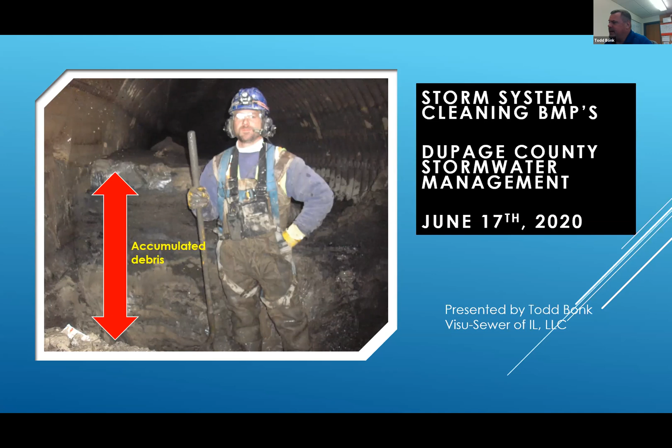Typical storm sewer system is designed with catch basins. Those catch basins need to be cleaned out on a regular basis. Once that sump is full, the debris will start going down the pipes. I guess the thing I want to caution everyone on is this is your storm main running down the middle of a street.

How does that water get into your system? Typically, it gets in through curb inlets with leaders coming into the storm system, to the storm main. A lot of times those curb inlets don't have sumps, they don't have catch basins. They're using the sump going down the middle of the road to catch all the debris. You can get debris into that 8-inch or 12-inch pipe, and next thing you know you've got a blockage and you're getting a backup on your street.

Luckily it's stormwater and not sanitary, but at the same time it's going to cause more issues unless we get that debris out of there. So one of the things we're going to talk a lot about is how pipes fail, what happens when they do fail, and some storm cleaning standard operating procedures that are really something you want to at least investigate, and we would strongly encourage you to adopt.

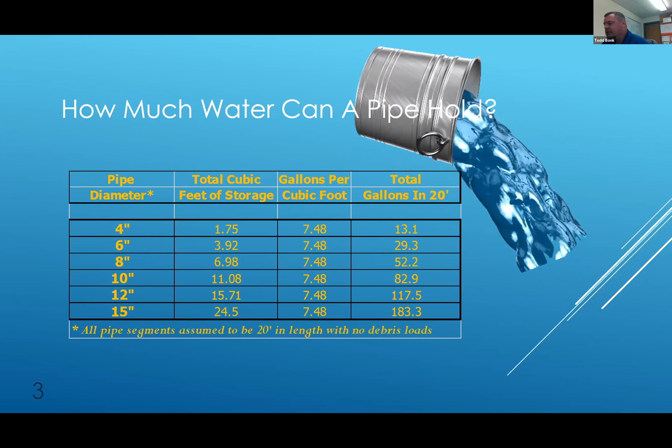Then if you have even more debris, look at how quickly it deteriorates from there. You go from 52 gallons per 20 feet down to 13. You're losing capacity in your storm system very quickly. You may have lots of capacity in the main, but you're losing it getting it to the main. So hence, what we'll talk about is keeping your catch basins clean, keeping your sumps clean, having as much coming out of your system in terms of debris as possible. That'll allow the water to run down your pipes, and you won't have near the issues that you could have.

I want to talk a little bit about how a sewer fails. This is universal, the same whether it's a sanitary sewer or a storm sewer. Initially, if you get water inflowing or exfiltrating, that inflow or exfiltration will start dislodging the soils around the pipe. You will create a void. Once that void gets created, it'll allow your pipe to collapse or move. Initially it's going to move. Ultimately it will collapse. So keeping that system tight is always a good idea.

Now, in some communities you've got non-gasketed RCP, and at one point people really didn't care if water got in or out of the storm sewer. They just wanted to get rid of the water. Well now you see gasketed RCP for the most part in your storm sewers, because they understand that we're creating a void around that pipe and ultimately creating a failure of that sewer pipe.

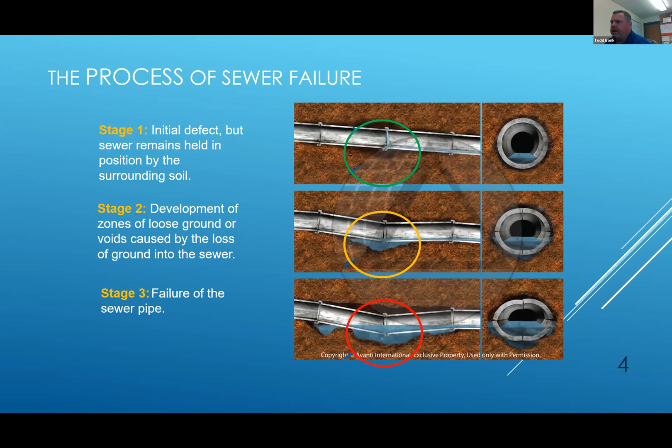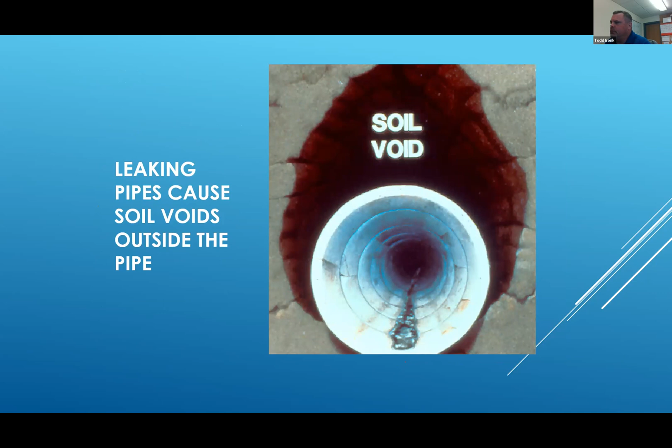When that water is infiltrating or exfiltrating, sooner or later you will get voids outside your pipe. And when you get a void outside your pipe, what happens? This happens - you end up with sinkholes. And as you can see by some of these, you're about to lose a house, you lose a car, you lose a truck.

More examples. So this one is an example down in Houston. And what's significant about this is people didn't think Houston was susceptible to any kind of infiltration or exfiltration, and especially not susceptible to sinkholes, because they had a very high clay content in their soil.

However, as you can see, even soils with high clay content need preventive maintenance on their systems, or this can happen. In a lot of places in the Chicagoland area, we've got running sand. You open up a pipe, any open joint, somebody directional bores through a pipe, and next thing you know, you've got a rainstorm and running sand bringing debris right into that system. You're going to get a sinkhole. It's pretty much inevitable.

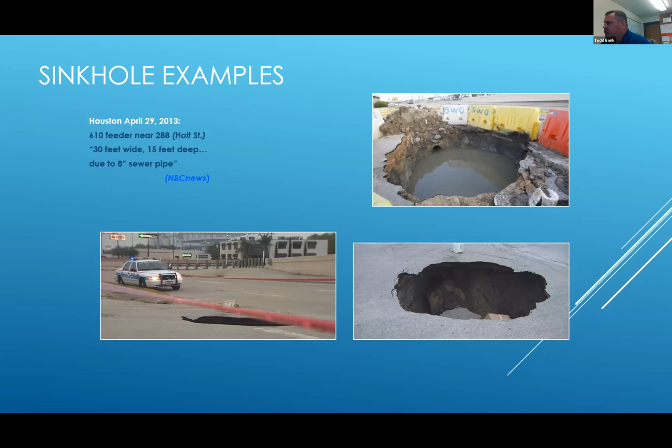So, storm sewer program and some of the SOPs. Basically, do you have a plan? Do you clean your sewers? Do you maintain or react? Maintaining is generally a lot cheaper than repairing the hole on the screen, where you've got not only a car that's gone down into a hole, but look at the pipes that have been destroyed in old brick manholes.

Do you have the proper equipment? If you're trying to clean 60-inch storm sewer with a trailer jetter, you're not going to be very successful. If you're cleaning big pipe, you need big equipment. If you're cleaning small pipe, those trailer jets are fantastic, but you're not going to move a lot of water. The way that you clean storm sewer is through volume. You need a lot of water to be moving through the system. If you don't have a lot of water moving through the system, you just simply aren't going to move that debris. Storm sewers are generally located on roads.

I have to bring this up, just like Chris brought up the COVID-19 safety concerns. Anytime you or your employees are out on the street, out in the public, please be safe. Your most important job is to get you home every night, period. So please make sure that you as a community have a good, solid safety program. Don't put anybody out there where they may run into an unsafe situation, okay?

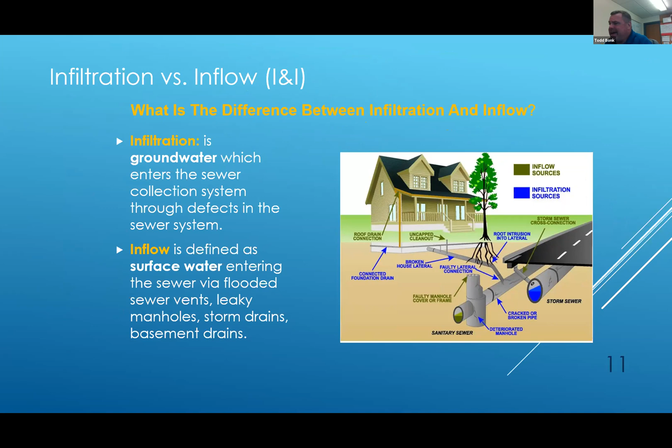Why is that important? If you look at it, almost half of the water flowing into treatment plants is storm water. This water does not have to be treated. Most of the plants in DuPage County cost anywhere from $5 to $6 per 1,000 gallons to treat sanitary sewage. If you have 50% inflow above and beyond your normal sanitary sewer levels, you're treating stormwater that doesn't need to be treated.

If your system is working, if your system is operating, that water is going through the storm system and you are not paying to treat it. If you're thinking of—

$5 per 1,000, and we get a huge rainstorm—it seems like we're getting the storm of the century every year—how much water are you treating? How much are you paying to treat stormwater that you don't need to treat? You could be spending it on a lot better things.

To not identify and not deal with inflow and infiltration out of the storm system into the sanitary is just irresponsible from a fiscal perspective. You want to keep your storm system flowing so that you don't have it overflowing into your sanitary system.

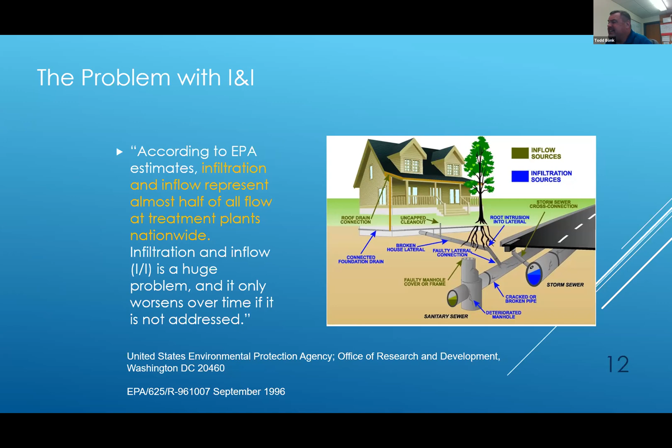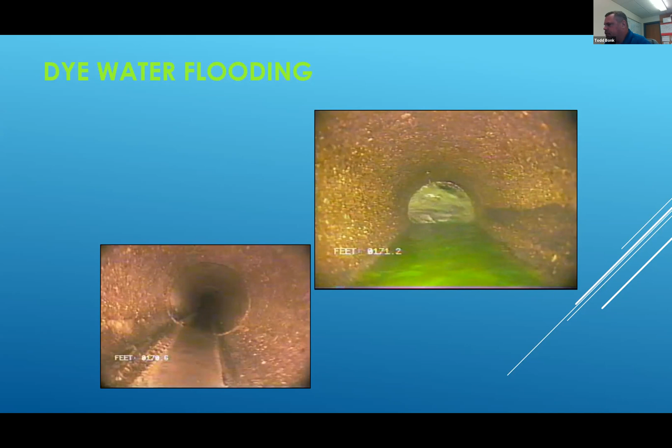And does it? Take a look at these dye test pictures. Same footage, same pipe—the storm system was surcharged. Where did it go? Right into the sanitary lines. So now you simulate a rain event like we did in the right-hand picture in a pipe, and lo and behold, we're treating a ton of water that doesn't need to be treated. You're spending it in your budget and you don't need to be spending it.

Again, same distance, same area, same results. So there is a lot of stormwater that, because the storm system isn't clean, is going into your wastewater treatment plants. You guys are paying to treat it as a county, as a community, and you don't need to do that.

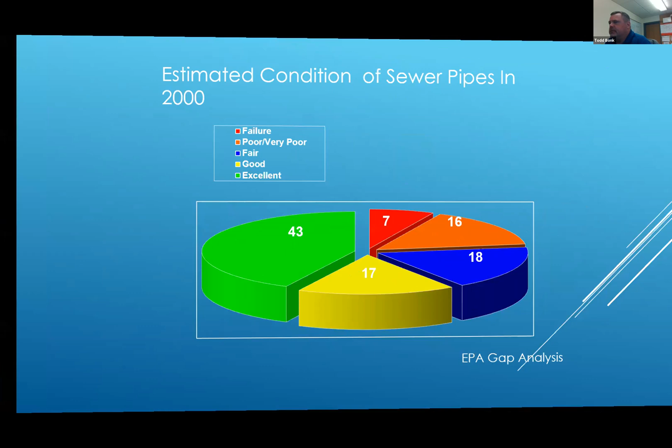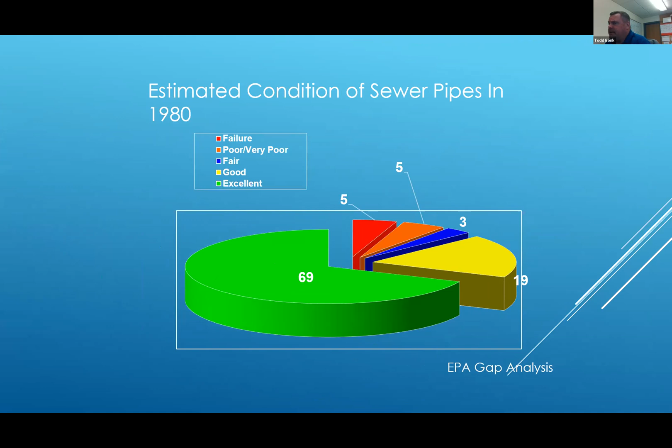Let's move forward to 2000. That number went from 10% to 23%. And look at the excellent category—it shrunk from 69% in excellent condition to 43%. Now let's go forward to 2020, and we've gone to a whopping 42%.

So these slides right here really tell you that you need to get a camera in your system, whether it be from DuPage County, who does televising, or from Visu Sewer, who does televising. Every 7 to 10 years, get a camera in your system. If you can get a camera in your system, you can alleviate some of these problems. You can see where the pipe is transitioning from fair to poor or poor to failure, and you can address it before it becomes an issue and you've got water flooding Main Street.

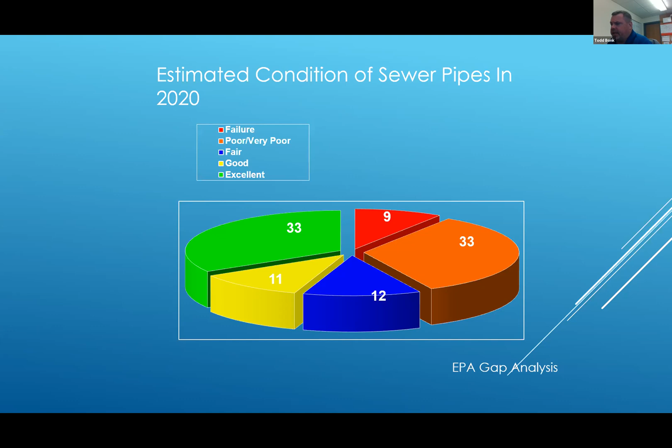So I guess in conclusion, I want to go through the storm cleaning program again. First and foremost, do you have a plan? If you don't, we need to look at getting a plan in place. That's where the Baxter Woodmans of the world are fantastic at helping you out, getting you pointed in the right direction. If you need a contractor to help, we're always willing to help.

Ask yourself if you maintain or react. Most communities react—we don't maintain. We wait until the system is full, it's overflowing, it's flooding out the mayor's home, and all of a sudden we've got to fix it. So, do you have the proper equipment?

If you're cleaning large storm sewer, you need large equipment. This is where you need a Vactor, a VACCON, something large, a jet truck, something that's going to move a lot of water through pipes. If we go out as a contractor and there's pipe larger than 27 inch on a particular job, we must go with the Vactor, simply because we need the volume of water to move the debris in the pipes.

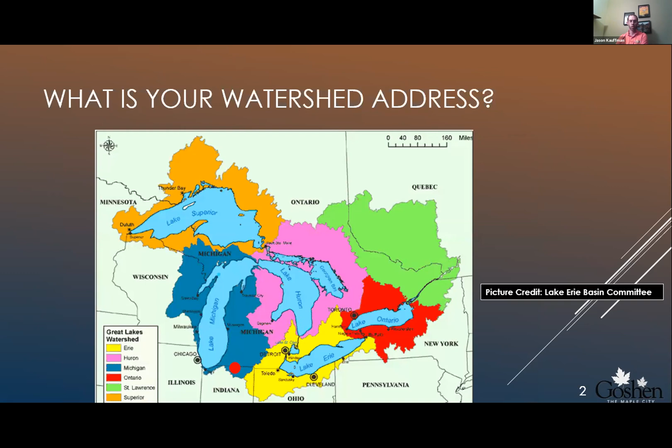So I like to figure out what our watershed address is. Let's focus where I work. Zooming in, it's the Great Lakes watershed, and Goshen is located in Lake Michigan. Zooming in closer, Goshen is located in the St. Joe River watershed, found in Michigan and Indiana.

Going in closer, the Elkhart River watershed is the largest watershed, one of the larger watersheds in Indiana, and the largest tributary to the St. Joe River. Unfortunately, the Elkhart River is also known for contributing a lot of sediment pollution to the St. Joe River, and it's a concern.

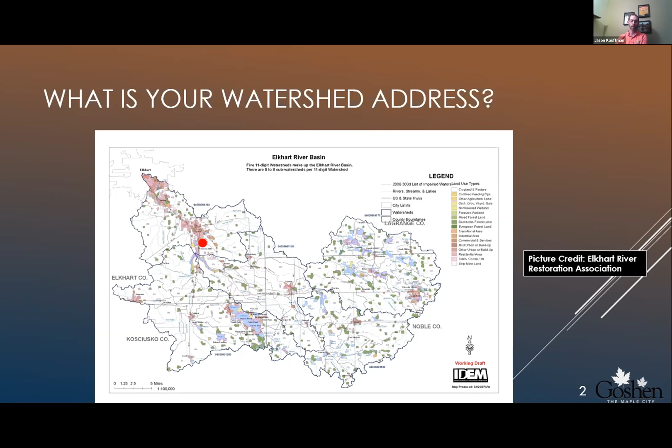So we are working a lot to reduce sediment pollution. You can definitely see that after a rain event when you go to the city of Elkhart where the two rivers come together. You can see the brown water mixing with the blue, and that's pretty evident for a couple miles downstream.

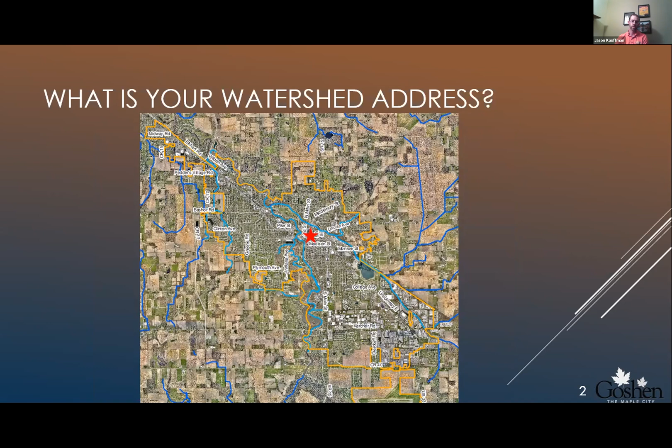Going in closer, you can see the different waterways around Goshen. You'll have the Elkhart River and Rock Run Creek that flow through Goshen along with some other streams and ditches. Getting closer, you start to see what we call a sewer shed, where the water runs across the hard surface and into the storm sewer structures and pipes. So for where I work, it runs into the storm sewer and goes north to Rock Run Creek and out to the Elkhart River.

So my watershed address is Rock Run Creek to the Elkhart River, then to the St. Joe River, which flows to Lake Michigan and eventually out through the Great Lakes and the St. Lawrence River to the Atlantic Ocean. So it's important to understand all sides of the story, that we all live downstream of somebody else, and what we do impacts the people downstream of us.

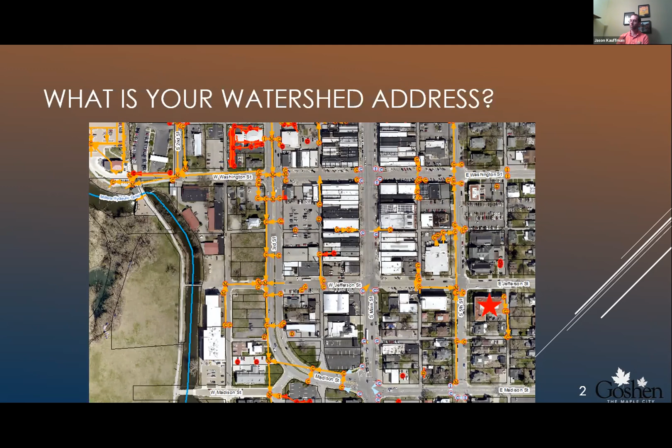So why is it important to dispose of landscape waste properly? Well, plants have lived and died for eons, creating rich topsoil as they decompose. But when you mix urban areas with natural areas, you get a mixture of pervious landscape and hard landscape.

When you have a lot of trees along your roads, you're going to have leaves falling in the fall, and seeds and blooms in the spring. But you're also going to have grass clippings. When you mix trees, plants, and grasses with streets, sewers, and lawnmowers, what would have once decomposed in place may now end up in a pipe, a stormwater basin, or a waterway somewhere else.

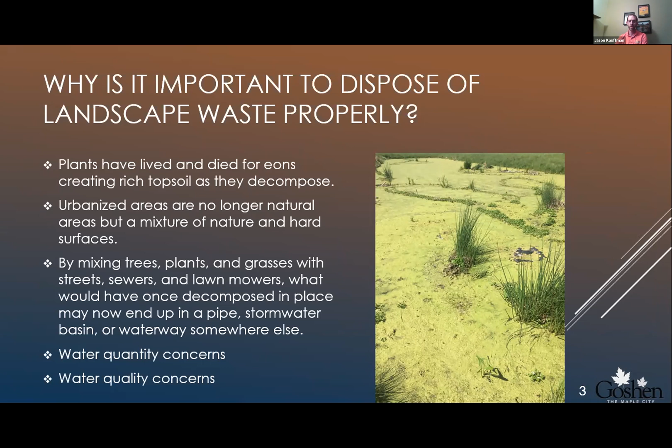There are many ways that you can improperly handle landscape waste. A lot of times what you see is people blowing their grass clippings, sweeping, raking, or hosing them out to the roadway. A lot of times people just don't understand that when they put it out on the road, it doesn't just go away down the storm drain. That storm drain actually goes somewhere and can create drainage issues because of clogged pipes, or it can also create safety issues for bikes and motorcycles because grass clippings themselves are slippery.

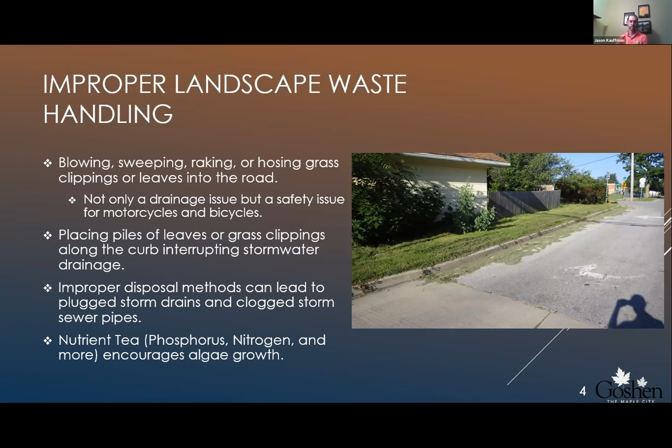Placing piles of leaves or grass clippings on the curb or in the curb line can cause the drainage to be blocked. In this case, you can see some water is being blocked, and during a rainstorm, that's going to push the water out into the street, which creates an unsafe situation for vehicles.

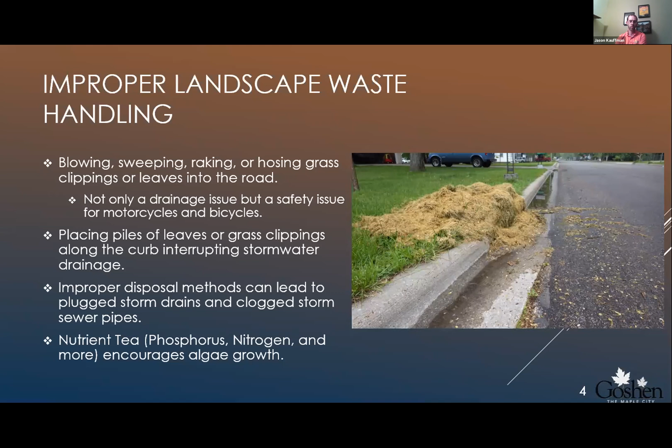Improper disposal methods can lead to clogged storm drains and clogged storm sewer pipes. You can see here grass clippings have accumulated in this pipe, and over time, if it's not cleaned out, trash, sediment, and other debris will accumulate and cause backups. Also, nutrients coming from decomposing landscape, leaves and grass, lead to phosphorus and nitrogen getting into the water and algae growth.

Some other issues we talk with our city employees about is making sure they know where the grass clippings are going when they're mowing. If it's not being mulched or chopped up and it's being blown somewhere, they need to know that if it goes out in the street, they'll have to spend time blowing it back into the grass. Or if they're going around waterways, they shouldn't blow it into the water, because that can lead to potential algae problems.

Another thing we look at, which isn't really landscape waste handling but how you deal with the landscape, is when to apply fertilizers and pesticides. Are they doing it at the right time, or is it going to rain in 24 hours, or has it just rained, or is it raining, and they're applying it at the wrong time.

One other thing that's come up this year is with construction sites, as we try to get permanent vegetation established. If our employees are mowing it too short, it actually makes establishing that permanent growth and cover difficult, which leads to erosion and needing more fertilizer and potentially more runoff.

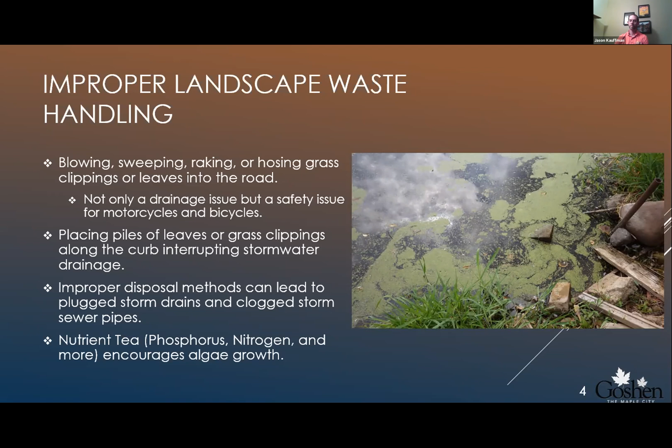When it comes to helping people understand the proper ways to handle landscape waste, education is key, whether with employees or the public. Making sure people understand and are reminded frequently about proper landscape waste handling is important, because often people are focused on other things than stormwater issues, especially at this time we find ourselves in. So providing education, whether through social media, bill inserts, or other ways to get information out to employees or the public, is key.

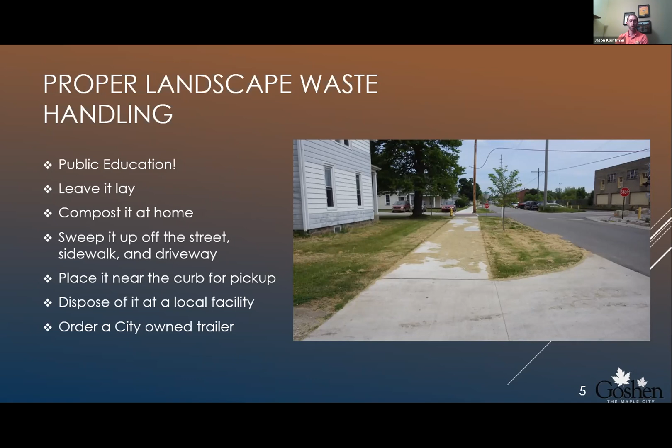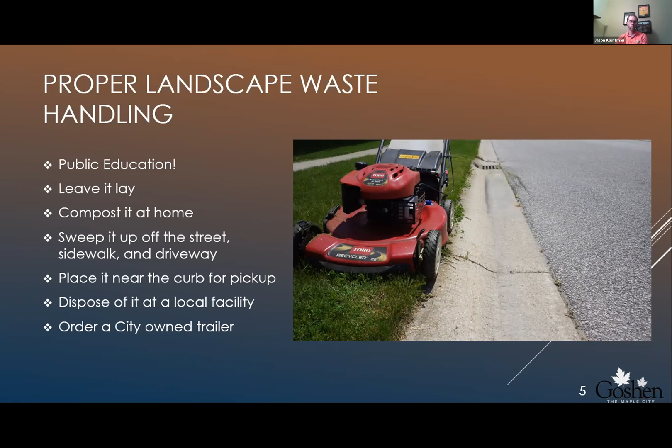So we encourage people to cut it at the right length, whether employees or the public, and we encourage people to leave it lay, which typically means using a mulching lawnmower that chops it up and leaves the grass clippings to decompose as natural fertilizer. If that's not the case and people want to collect the grass, they can compost it in their garden or use it as a weed barrier. If they still can't do that, they can collect it and take it to the environmental center, which I'll talk about in a bit.

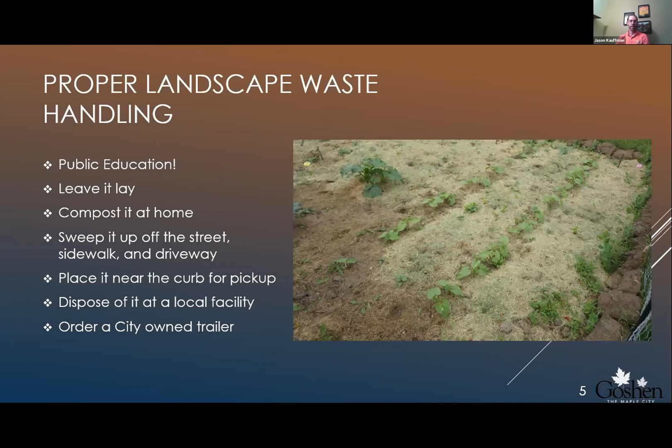We do know that when mowing the lawn or raking leaves, grass and leaves are going to end up in the street, and that's accepted. But we encourage people to sweep it up or blow it back off the street, sidewalk, and driveway into their lawn or grass, so it doesn't go down the storm drain.

If landscape waste like bush trimmings or branches is being collected, we encourage people to place it near the curb for pickup, because the city of Goshen does have a pickup throughout the year, which I'll talk about in a minute. But if that's not possible, they can dispose of it at the environmental center, our local facility, or they can order a city-owned trailer for drop off that they can fill up and have for a day or over the weekend if they're trimming more bushes or trees.

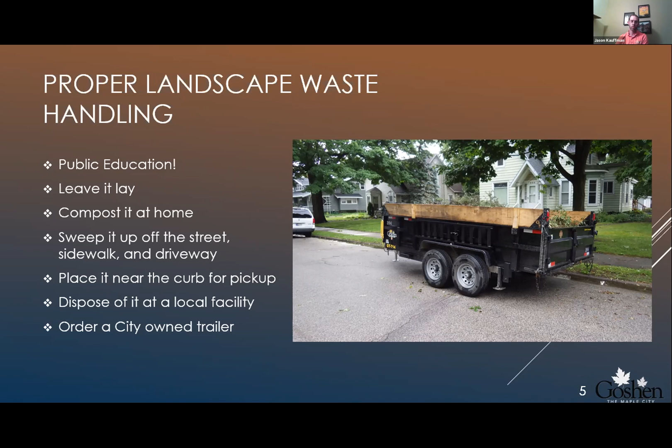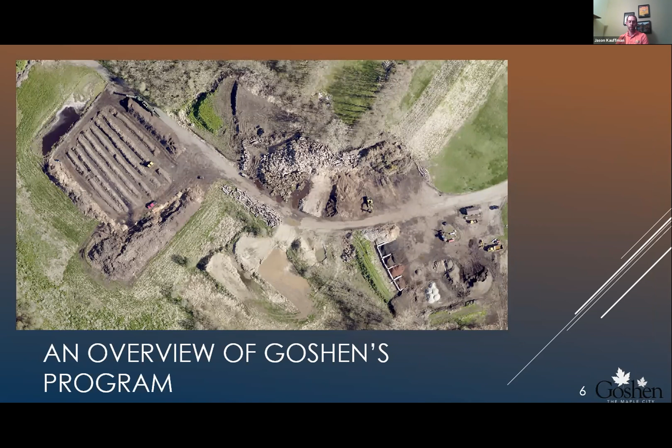So that gets me to the city's program on how we deal with landscape waste. What you see here is the Goshen Environmental Center. This is where all the material comes in, it's processed and converted into something that can be used by public employees at our parks or around buildings, and also by residents. It keeps material from going to the landfill.

The city of Goshen offers brush pickup throughout the year. In the last week of April, the Goshen Street Department comes through and collects brush, leaves, and other landscape waste that residents have collected through the winter. They do two passes through the city.

This allows residents time to get the material out close to the edge of the streets or to the curb. In some instances, with all the small piles around, to save time some of our employees will go around with a truck and pick up the waste, bring it to a central location where the loader can then pick it up off the street and put it in the dump truck and take it to the environmental center.

They do this throughout the summer as well, from May through September. The last Monday of every month, they take another week and run through the entire city again to pick up landscape waste generated by residents, so that people don't have to go to the environmental center. They can put it there, but it has to be timed right.

Typically you will see some piles out there the week after the street department comes through, and it sits there for three or four weeks. If it's not put in the right spot, it creates a problem, a drainage problem, or a problem with people using the sidewalk or driving.

One thing the stormwater department works with the street department on is placement. The street department would love to have material as close to the edge of the street as possible because it's a lot easier for them to pick up, which I understand. But we also are trying to not create stormwater drainage issues. So it's important that we work together to find out what works best.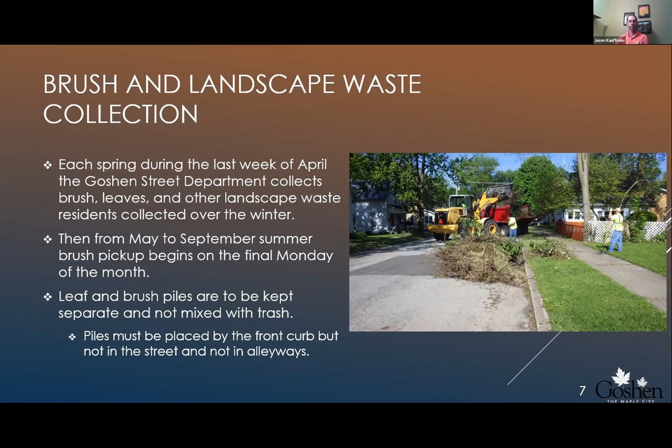The other two options I've talked about: you can order a trailer from the city to be filled up with brush, or you can drop it off at the environmental center. The trailer is free of charge. The environmental center, depending on the material you drop off, there might be a small fee associated with that, and it's only available to residents.

In the fall, the city goes through and picks up leaves, typically beginning in mid to late October and lasting through mid-December. But it is weather and tree dependent. If the trees aren't dropping leaves, the street department can't go through and pick up the leaves, which can create problems if leaf pickup runs into snow plowing, as it sometimes does.

Residents are encouraged to rake leaves into long piles in the grass, as close to the edge of the street as possible, and not block the entire sidewalk. By making long piles like this, the street department can come through with their vacuum trailers and pick up the leaves fairly quickly.

Residents are encouraged to spray their leaf piles at least enough to wet them down, so that windstorms do not blow those leaves around. Again, residents are asked to keep the leaves off the streets, because the leaves can interfere with traffic flow, drainage, and snow plowing.

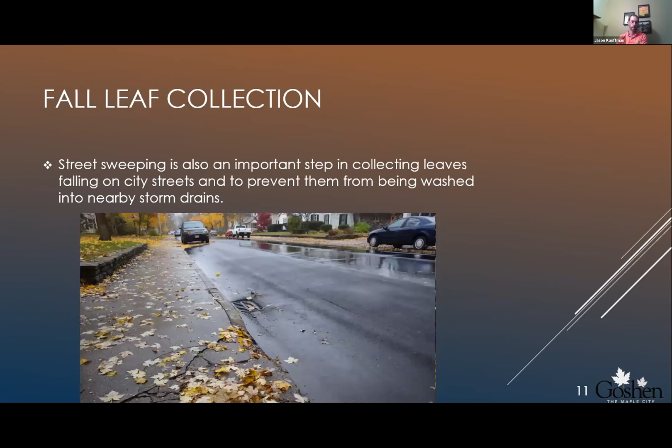Storm damage is something else that our street department does with landscape waste handling. A week ago, this past Wednesday, we had a severe storm come through Goshen that created a lot of downed trees and branches. So the street department will go out during those events, or immediately after, and start removing trees from the right-of-way or from the road so that traffic flow can be restored.

Sometimes if the damage is extensive enough, like it was last week, the street department will hold a special brush pickup. In the next week or two, the street department's going to be going through the city once again picking up all the debris that's there, and there's quite a bit. You can see piles in those hard-hit areas along the street.

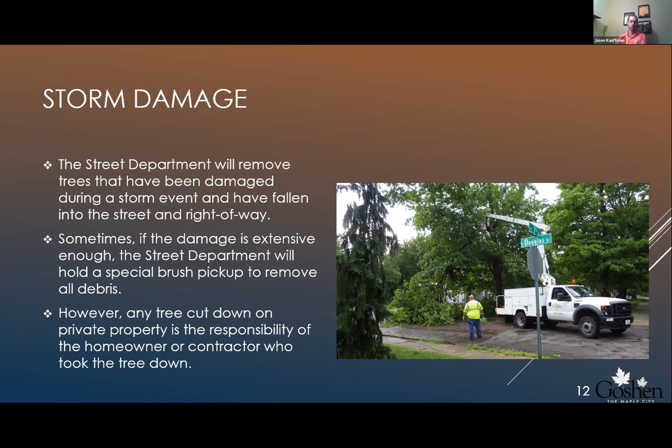However, if a property owner or a contractor takes a tree down, they are responsible for the proper disposal of that. They could take that to the environmental center.

The environmental center is located on the north side of Goshen. It's available to residents to drop off branches and leaves free of charge, and yard waste and grass clippings for a small fee. It's open Monday through Friday in the winter months and Monday through Saturday in the summer, and closed on holidays.

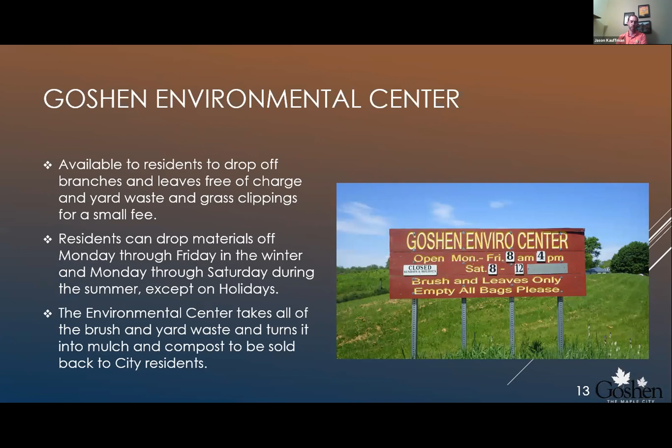The environmental center takes all the brush and yard waste and turns it into mulch and compost that can then be reused by city employees at the parks or around the landscaping at city buildings, or it can be purchased by residents for their use.

So let's get into the process that we use at the environmental center. It's dropped off by residents bringing it in on trailers, or by city employees picking up the dump trailer and dropping it off, or the dump trucks coming in after brush pickup every month. They'll drop that off where it can be sorted and prepared for the grinding process.

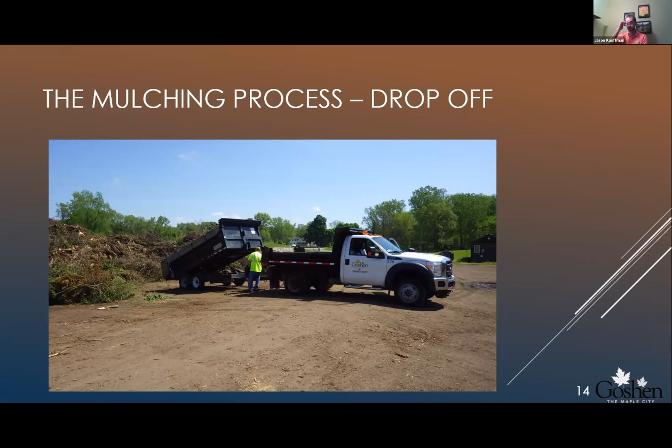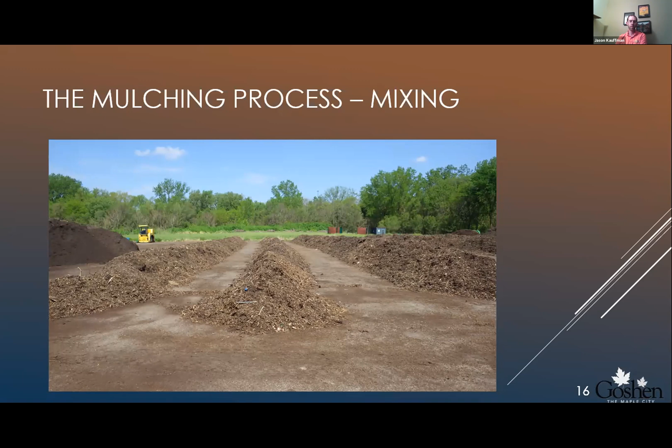It's sent through the grinder to chip up the larger pieces and prepare it for mixing, where it is placed into windrows, which is what you can see here. The yellow piece of equipment in the back corner is used to turn these windrows 1 to 2 times a month to help the process decompose. You can see that machine here closer.

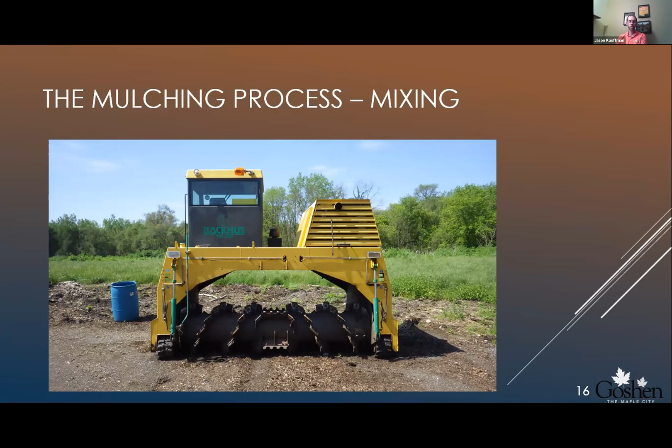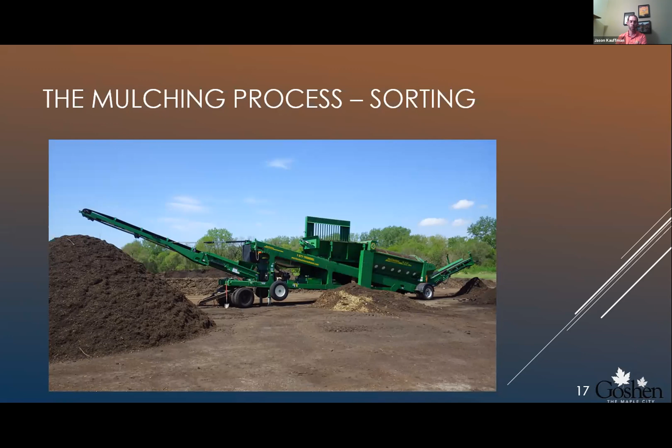Once the mixing process has been done for about 6 to 8 months, the material is ready for sorting. If you've ever made applesauce, it's a similar process. You take the material that's been processed for 6 to 8 months, or the cooked apples, and put it into the sorter or the strainer, and send it through the system. As that material goes through, it's sorted either into the fine mulch or applesauce, or into the waste, like the larger material, or the skin, stems and seeds, which can then be sent back through the process of grinding, mixing and sorting, so that you eventually get a nice final product of mulch.

In this case, it's a colored mulch, something that residents can come and get. They can either pick it up themselves for a fee, or have it delivered at a bit more cost. Besides the mulch, there is also compost available to people, which takes about 12 months, a little over a year, to process.

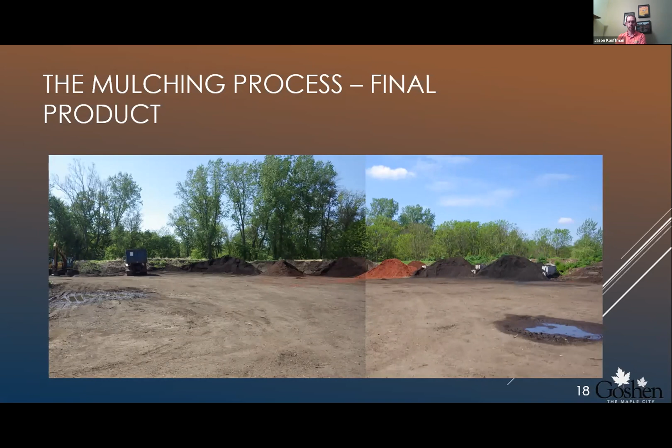Then the final thing is to install it. This is landscaping or mulch that was installed around landscaping just this year.

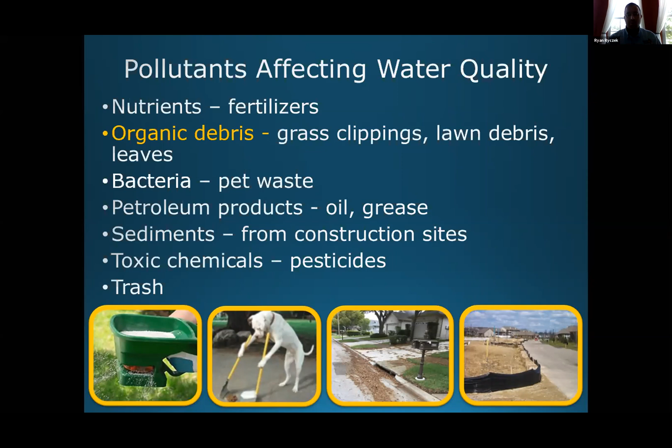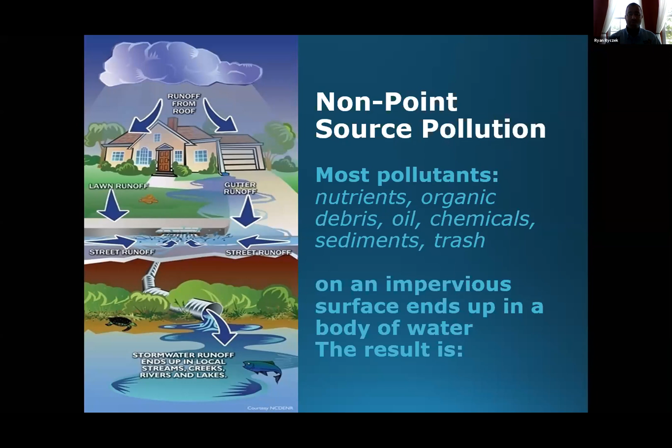Non-point source pollution is basically any pollution that runs off due to rainfall, usually over impervious surfaces, but can also come from other landscapes or from leaching through the lawn and landscape. It ends up in our storm drain system one way or another, or in our streams, and eventually gets out to our bodies of water. Sometimes it's treated, sometimes not—sometimes there are treatment ponds, sometimes not, depending on the age of the system and how it was set up.

And the laws and regulations. So we had the Clean Water Act back in the 1970s, introduced because of all the pollution issues we had. Along with that, the Clean Air Act addressed most of those two first issues we talked about.

Then the NPDES, National Pollutant Discharge Elimination System, was developed to address non-point source pollution particularly. That started around 1999 when it got implemented, so it hasn't been around too long because that's what was determined to still be a problem after the other main issues were taken care of for the most part.

There's maybe state requirements or regulations for fertilizer, also for illicit discharges and fertilizer. There may be local laws or requirements as well. I'm not sure what's in your area, but I know all major urban areas do have illicit discharge ordinances as a requirement of their permit, and they're required to enforce those and follow up with any complaints and things like that.

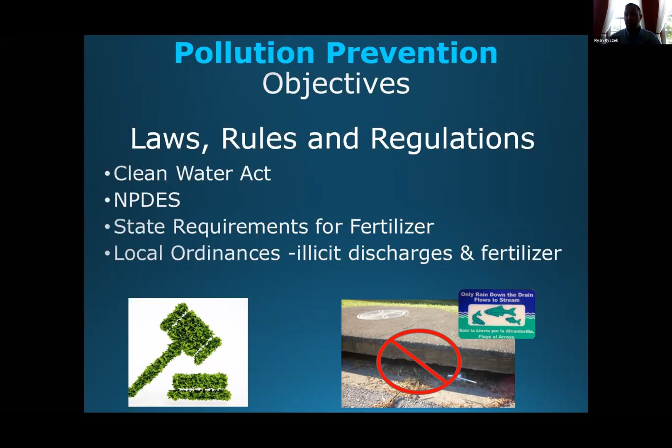Just to give you a little overview, our program has been in place since 2010. It's a county-wide ordinance. It has a 50% slow release nitrogen requirement and no phosphorus applied to lawn or landscapes, to reduce that nutrient pollution from fertilizer, that number one thing we were talking about. And then application restrictions, so you can't do it during rain events and things like that, which is pretty common in most places. There's also a restriction to the summer rainy season we have.

It may be dependent on your area when you should do it. Like your example in your area, you shouldn't do it going into dormant season in the wintertime or when it's cold out. Basically below 50 degrees, the grass isn't going to be actually growing, so you wouldn't want to fertilize it during that period. It'll be different depending on your location.

And then certification. In our county, we do have a landscape best management practice certification, so all landscapers doing mowing, blowing, tree trimming, anything like that—all tree companies and landscape companies are required to take that training. This is actually part of the training, what I have shown you today.

It's a very small portion of it because it's about 2.5 to 3 hour class, and there is a test at the end that we do. Also in Florida, we do require a fertilizer license for any applicators, and they have an 8-hour required training for that, renewed every 4 years.

That training helps them know how much to apply, when to apply it, all those local requirements that I was talking about. And then pollution prevention.

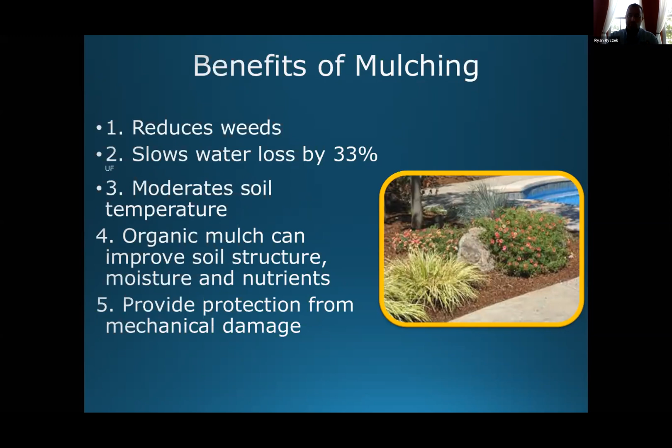Mulching is important because it reduces weeds, reduces erosion, reduces soil or water loss by 33% according to the University of Florida, though I've seen some studies show as high as 76%. It improves the growth of the plant and also improves the soil structure underneath, providing nutrients and moisture holding capacity back to the soil and root systems. It also prevents mechanical damage when you put it around trees, especially small saplings, from weed whacking them.

Pruning: in our presentation and training, we also cover pruning. It's about controlling growth and making sure you have proper structure to the trees and those sorts of things. Make sure you know when an arborist is needed. If you do a lot of pruning, it's always good to hire an arborist or consult one on what to do.

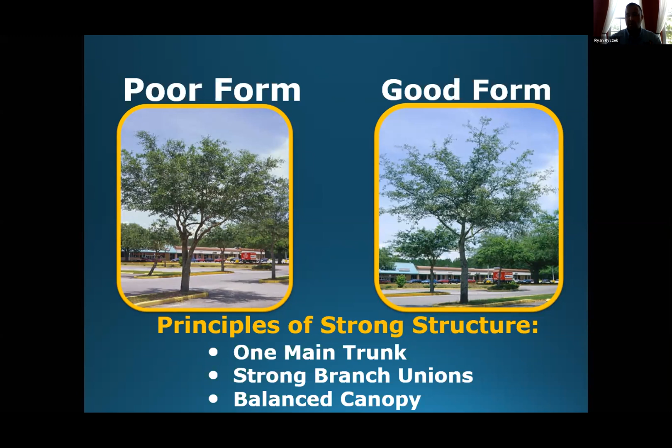You don't want to top trees. It's ugly, it's bad practice. It's not good because it creates a bunch of congested limbs that are too close together and poorly attached. It can become hazards later on and things like that.

So if you need to do heavy pruning of a tree, make sure you hire an arborist that knows what they're doing. Different trees can be pruned different ways depending on species and stuff like that. It's a good idea to consult an arborist.

Lion's tailing is bad too because it allows wind to go through the trees. A lot of times it's done to get sunlight to a lawn below it, or maybe in commercial areas to see the signs or buildings. But it's a bad practice because if a windstorm comes, the wind actually goes through the tree as opposed to up and over the whole canopy, and it can cause it to flap in the wind like a flag on the end of a flagpole. And it's more likely to cause damage.

It's hard to restore because it shades out all the branches below. You'd have to thin the top canopy several times to encourage the growth down below.

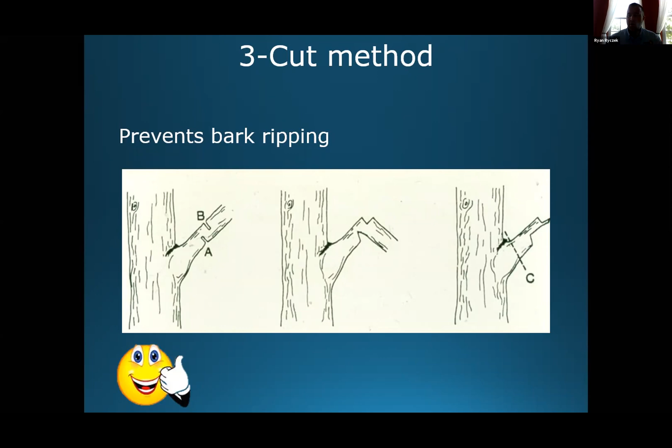Pruning debris and management. So when you're pruning trees and limbs and shrubs, those sorts of things, mowing, you might have debris left over. You want to make sure you handle that properly. A good option, especially when you've got, in this example, shrubs that go way down to the ground, you can actually just rake those underneath. They'll act as mulch, give nutrients back to the soil. It's going to improve the moisture in the soil and all sorts of things.

You're not really going to see it. And if you want it to look nice, you can always go back and put a new layer of fresh mulch right over the top of it. And then you don't have to haul it off or dispose of it or anything like that.

So for turf, you want to know your grass types in your region, know the proper mowing heights for those, when and where turf works, identify and prevent turf stress, and keep debris off impervious surfaces, and know about low maintenance or no-mow zones. So turf does a few good things for water pollution.

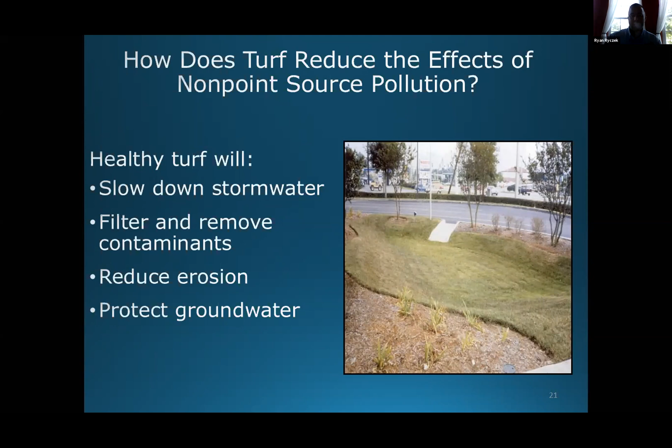It helps slow down the stormwater velocity and it basically acts as a filter. So the grass itself, the thatch layer and the roots actually help filter out contaminants. The roots will help uptake nutrients before it gets to our groundwater. The roots, the thatch and the blades also help reduce the impact of rainwater on the soil surface, causing erosion and help hold in those soil particles. And that helps protect our groundwater and surface water.

So in Pinellas County, they recommend a 6-foot no-mow zone. I think a no-mow zone is a good idea near your water bodies for a couple reasons. One, you can plant it with native vegetation, so it's good habitat for wildlife. Also, then you don't have to worry about taking your mower for a swim.

You don't have to worry about trying to weed eat that. I've done that before, it's not fun. Hours of weeding along stream banks is not a fun thing to do. You just go in there periodically and clean out any invasive weeds and stuff like that you have.

You plant them real densely with natives. A lot of times it can look really nice and provide that wildlife habitat and be less maintenance. And instead of mowing it every time, you just go in there every couple weeks or so, 8 weeks or so, and just clean out any weeds you don't want growing there. And it's always good to have some emergent aquatic vegetation along the shoreline as well to reduce that erosion.

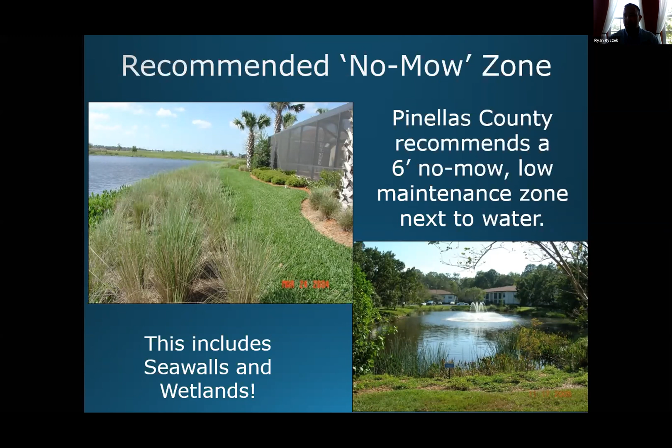Mowing height is very important. It helps increase drought tolerance, and it increases nutrient and water uptake because the taller the shoots, the deeper the roots, as I like to say. That picture says 1,000 words. When you have taller shoots and deeper roots and more root system, it can outcompete weeds particularly, since they can't get started with all that competition for nutrients, sunlight, and water. It also has more pest resistance when it grows more efficiently that way.

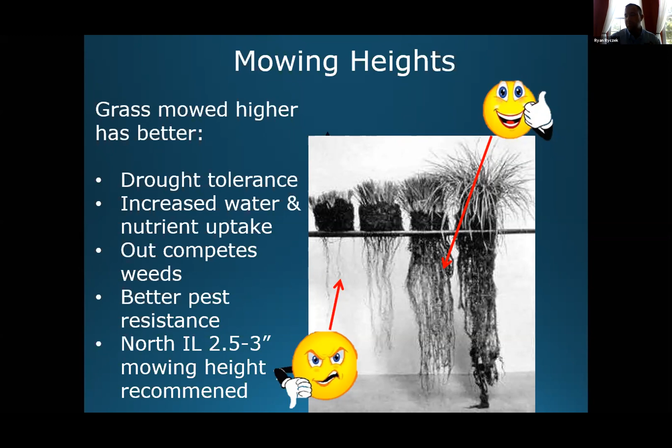I looked it up for Northern Illinois. The Illinois Extension recommends mowing about 2.5 to 3 inches for our area as the proper mowing height.

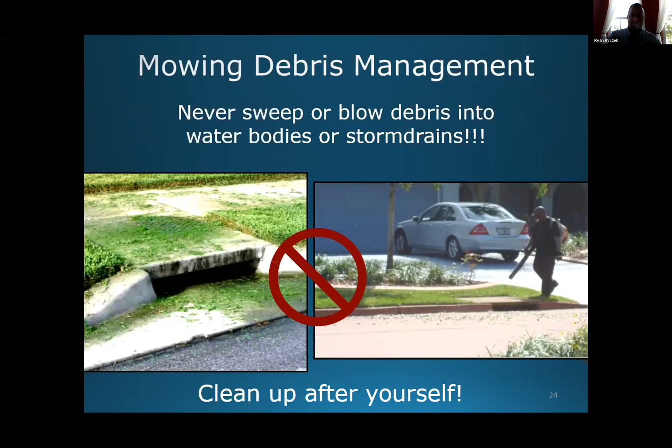As for mowing debris, you want to make sure you keep it out of storm drains, like we talked about earlier. When you're mowing, if you have a chute shooting it out, try not to shoot it towards the front of a storm drain. Make sure you blow it back into the turf or clean it up otherwise, to keep those storm drains clear and prevent nutrient issues.

For equipment maintenance, make sure your equipment isn't leaking. Clean up any chemical spills related to maintenance, and make sure you store and transport your materials safely and protect your equipment.

When mowing, keep sharp mower blades, sharpening about every 8 to 10 hours, so you don't have to go back over areas. Make sure your mower deck is still mowing at the proper height—check that periodically, because hitting things wears it over time. Sometimes the numbers on the settings don't really mean inches, they're just a random number, so it's always good to check the actual mowing height.

Make sure you don't run over rocks, stones, trash, or debris, so you don't hit somebody's car or hit somebody with something flying out of your mower, or damage your mower.

Maintain and fix leaks. Make sure you do it on an impervious surface so you can clean up any spill. It's very important that it's ideally under some kind of covering, so if it rains it won't wash off—like under a carport or in a garage.

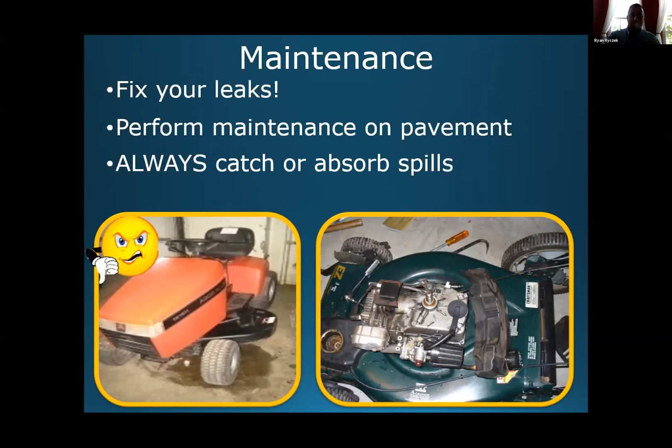Secondary containment for your chemicals is really good to do. That way, if a container leaks, it won't go out into the environment—you can clean it up.

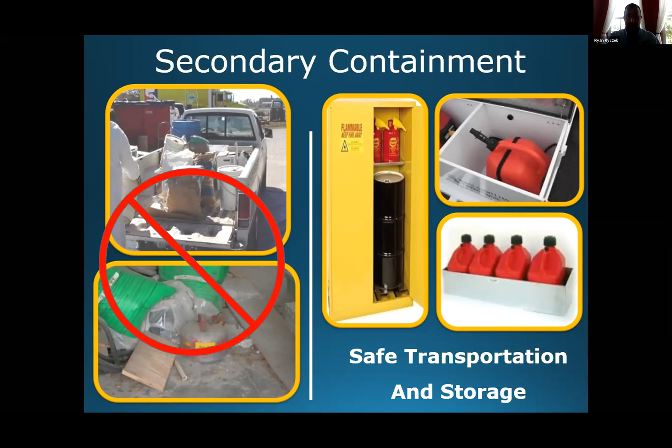Also, for mobile storage, it's good to have a lid, like on a gas can. It keeps the weather off, keeps it from degrading or heating up and swelling. Otherwise, when you open them, they can spurt out gasoline, which could get in your eye or get into the environment. So it's good to keep a cover on them. Also, when gas gets expensive, people start stealing cans, so keep them out of sight or locked up.

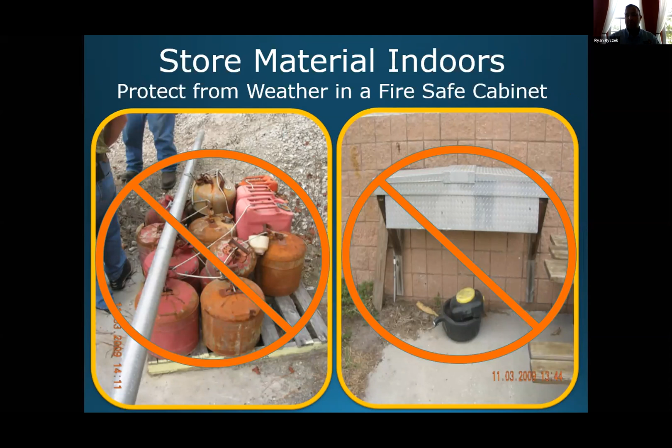Make sure to store materials indoors—that's a good idea to keep any residues contained. Also, keep the integrity of the vessel intact, because sunlight and weather degrade containers over time and seals will start going bad. The more they're out in the weather, the shorter time they'll last.

If you have a spill, clean it up immediately. Use sand, kitty litter, or any absorbent granules—there are lots of materials for that. I like absorbent pads, they're really good. They got kind of expensive after the oil spill in the Gulf, but they're coming back down in price and they work excellently. They don't take up much room, they're easy to clean up, and they absorb a variety of chemicals. It's really good to have a set of absorbent pads on hand in your cleanup kit.

If you have granules or something to absorb a spill, make sure you have a way to clean it up, like a dustpan, broom, or shovel, to put it in a bag and know where to properly dispose of it.

A little touch on irrigation and nutrient pollution—it's actually very important, because proper irrigation helps prevent leaching and runoff. There's frequency and duration: frequency is how often it runs, which should be about once or twice a week, at least for our area, as the proper amount.

Duration would be how long it runs for, and there's ways to determine that. I'll talk about that in a minute.

You want to troubleshoot irrigation systems, look for leaking pipes, leaking valves, broken heads, those sorts of things. There's wastewater, which can also cause erosion issues sometimes. A rain sensor is always good, so it's not going off when you don't need it.

Make sure you use quality watering restrictions if you have those in your area, which prevent water stress by properly watering your lawn and landscapes. Then identify signs of overwatering. Usually certain weeds pop up, you get more weed problems, things like that. Or sometimes the lawn will start rotting if you're overwatering, so keep attention for those kinds of things.

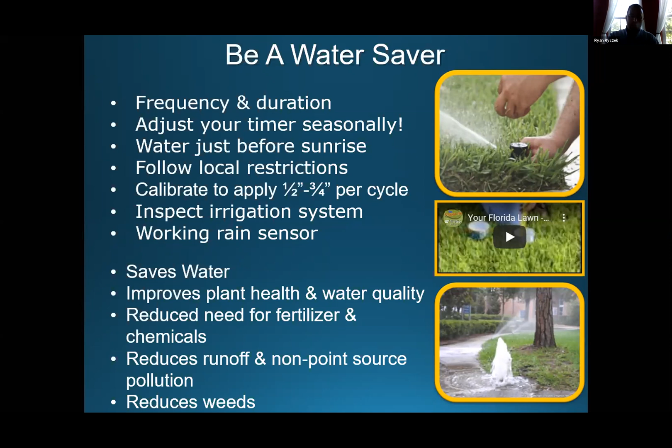It also reduces weeds. Debris management - you can learn more about debris management and how it affects water quality. You want to make sure that you aren't spreading invasive pests and species.

I know it's a big problem here. I know up north it's different species than it is here, but pay attention to that when you're disposing of landscape debris and those sorts of things.

Then make sure you recycle your landscape debris or dispose of it properly otherwise. And know who to report violations to.

So if you see people improperly disposing of debris, dumping stuff, blowing grass down the street, know your local municipality, maybe find out what number that is to call or a contact.

Here we have SeeClickFix, which is an app on the phone you can report stuff on, which works really good. You may have that up there, it makes reporting really easy. But it's good to know those things ahead of time so when you see it, you can just report it.

And maybe you all can follow up with what's appropriate for your area on that, or what division or department you have to report it to.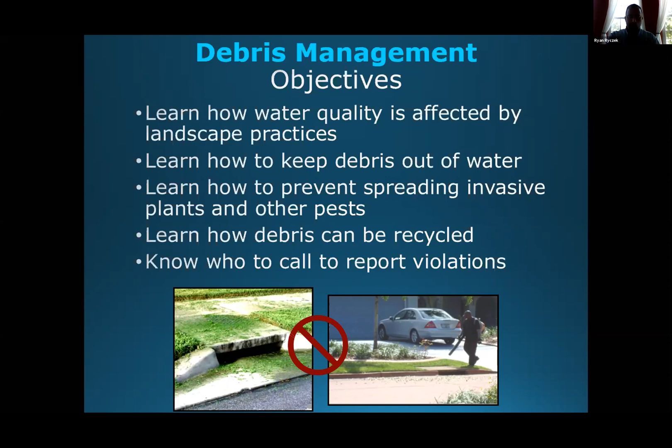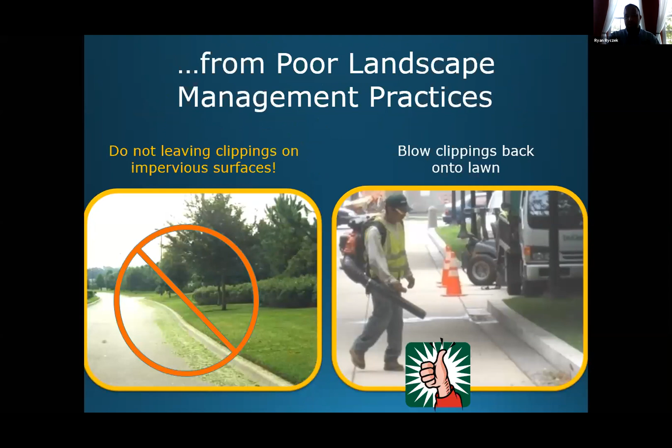So we want to prevent those unwanted nutrients from reaching our water bodies, and we do it by cleaning up after ourselves, making sure we're using chemicals properly, and making sure we dispose of the landscape the way we should. Like I said before, that leaf fall season is very important.

Believe it or not, here in Florida we actually have a leaf fall season too. We actually have two of them, depending on the trees. Some fall in the fall, some fall February to March, when the new leaves come out. So we do get a lot of leaf debris during that time as well.

So it's good to keep it out of storm drains, to prevent storm drain flooding, as well as the nutrient issues and bacteria issues as well.

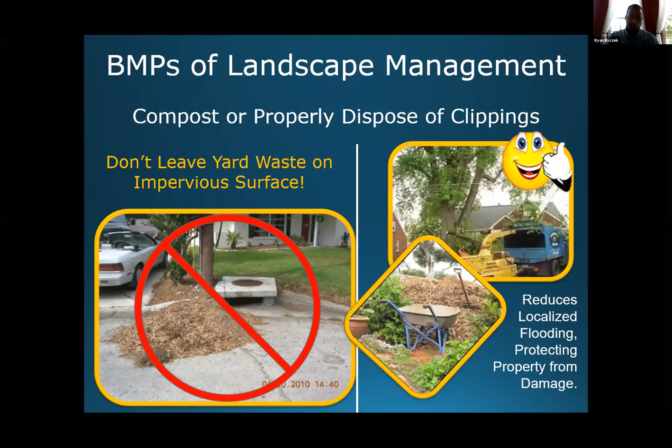Make sure you don't illegally dump. Make sure you know your dump sites for proper landscape debris dumping. If you see that happening, know who to contact.

I don't know about it there, but here it's actually a Class 2 felony if you're a commercial person illegally dumping, and they can actually confiscate your entire rig - truck, trailer, mowers, everything. So it can depend on who you report it to, how it can be handled.

And then make sure you use recycled grass clippings and leaves. Mulching in your lawn is great because it's basically free fertilizer, helps improve the soil structure, retain moisture, and give nutrients back to your lawn.

Time is short, lots to talk about on this topic. I could talk about it for hours, but we don't have that much time. So to learn more, I suggest visiting the University of Florida, University of Illinois Extension. They probably have good information on that. Other general industry resources for your state are really good as well. And look for new publications that come out, because new science is coming about all this stuff all the time, and sometimes it dispels long-held thoughts on certain things. So it's good to keep up to date.

And always ask questions. It's always a good thing to do. That's how I stay professional.

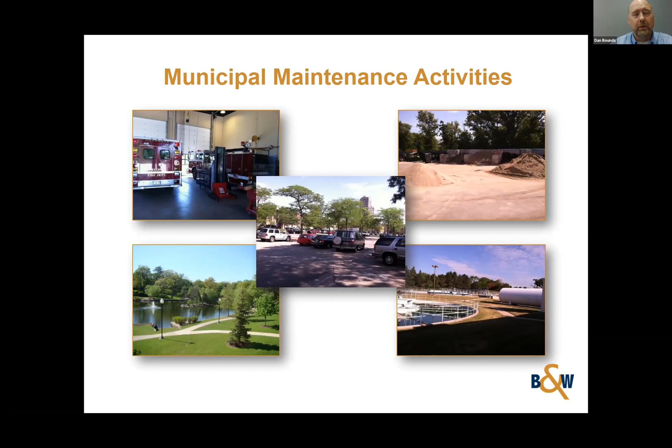Our previous presenters talked about some of these common sources of pollution or pollutants, but here's a list again, and some of my favorite photos from my 25-year collection of things flowing out of storm drains that probably should not be. What I'd like to do is go through most of these types of pollutants and talk about the way they affect the environment.

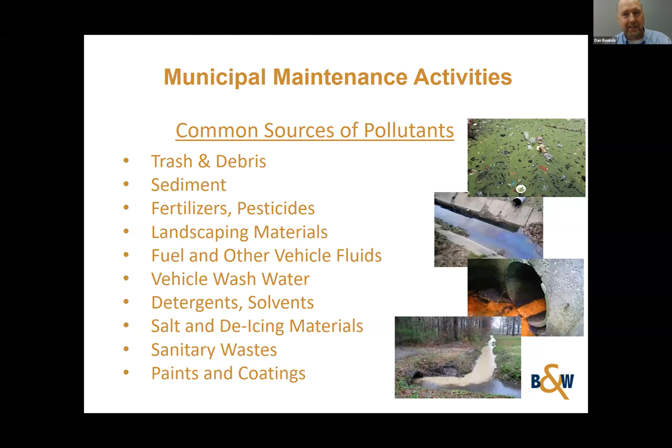A disclaimer, I'm a water resources engineer, everybody. I'm not an aquatic biologist. I'm not a toxicologist, but I'm gonna pretend to be one maybe here for a little bit and be dangerous with the topic.

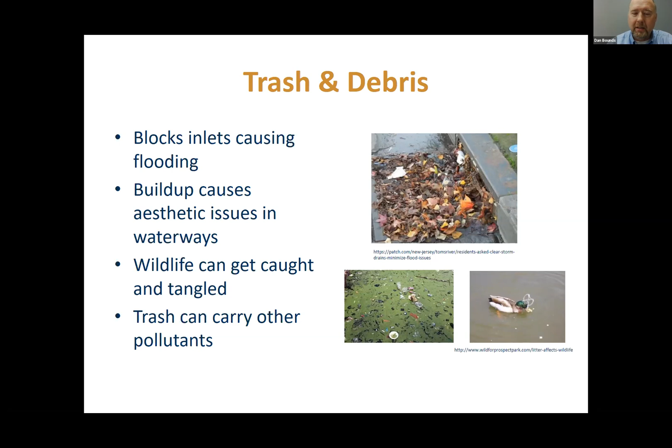So let's talk about trash and debris first. You've seen lots of photos already of things blocking inlets, causing drainage problems. That trash and debris gets out into our streams and lakes and looks very unsightly. Doesn't look like a well-managed program, and we've got a lot of trash and debris in our waterways. Wildlife can get caught up and tangled, and it affects the way they need to do what they do in the wild. Trash can carry other pollutants. It's not just that paper or that foam, it's what else is in there - food waste, other types of garbage trash. Trash can be the vehicle that carries other pollutants into our waterways as well.

And then sediment does a lot of things in the environment. Sediment is, if you've got disturbed soil, working with soil materials, that soil gets weathered, broken down, and can create sediment issues going through our storm drain system into our local waterways. It contains fine particles - we're talking about the silts, the clays that stay suspended and get out into our waterways and then eventually settle. If you've got BMP or pollution prevention issues at construction sites or municipal yards, you can have this sediment running off. But really any paved area that's collecting sediments and can wash off during a rain event, or any disturbed soil that you're working with out in your field activities, can be the source of sediments.

And the first thing excessive sediment is going to do in the environment is start to block light. And if you start to block light with cloudy or turbid water conditions, you're going to affect the plant growth in that water body. That plant growth is essential to the health and proper function of that ecosystem. Think of plant growth and the food chain that you learned about in grade school, providing the food and source of nutrients for higher order species. That sunlight is critically important for that.

That sediment inside the organism itself, or around the organism like a fish, can start to clog or damage sensitive tissues in that organism, be it macroinvertebrates or fish. Kind of think of that sediment as sandpaper in the waterway, moving through the organisms and really damaging sensitive tissues. That sediment can start to suffocate bed organisms and form thick deposits on the bottom of streams, and that can destroy aquatic habitats and especially spawning beds for fish and other organisms.

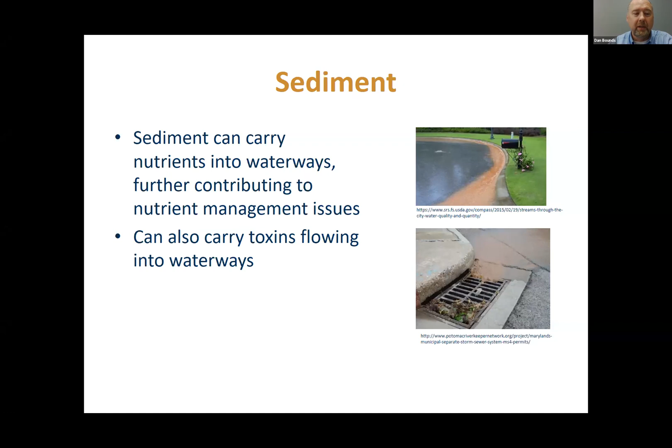Fertilizers we've heard a lot about, and those were great presentations we heard earlier. It can come in through stormwater runoff and provide excessive nutrients into our waterways. An overabundance of that fertilizer creates an ideal environment for growing algae, and it really reduces the aesthetic quality or the enjoyability of those water bodies too.

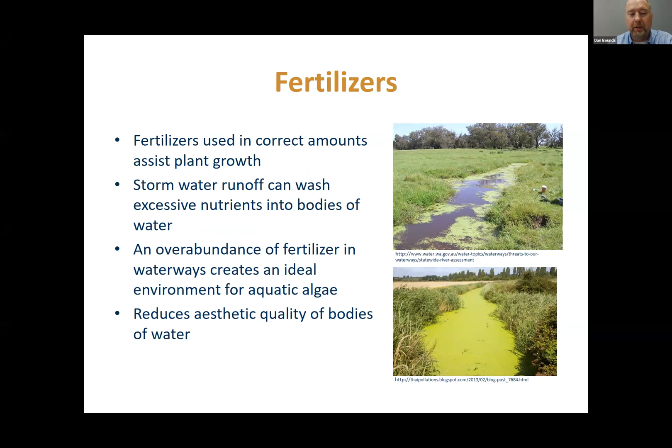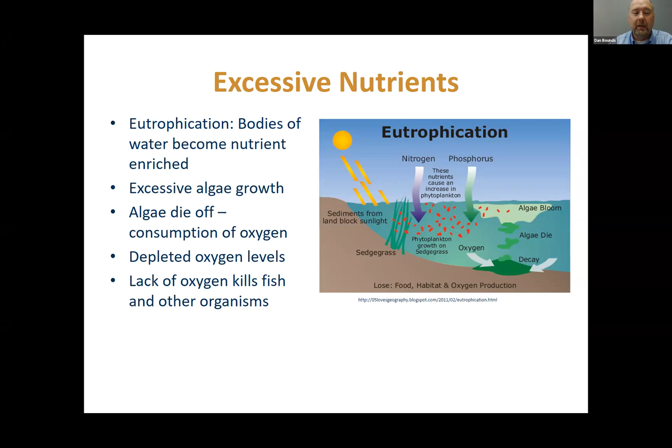But one of the processes this creates is eutrophication, and I like to think of that as a chain reaction that can happen. We get that excessive amount of nutrients in the water body and start to grow excessive algae. That algae will die off, and all of that dead material will start to consume oxygen, which will deplete oxygen levels in that waterway and create fish kills and loss of other organisms. So eutrophication can lead to dead zones.

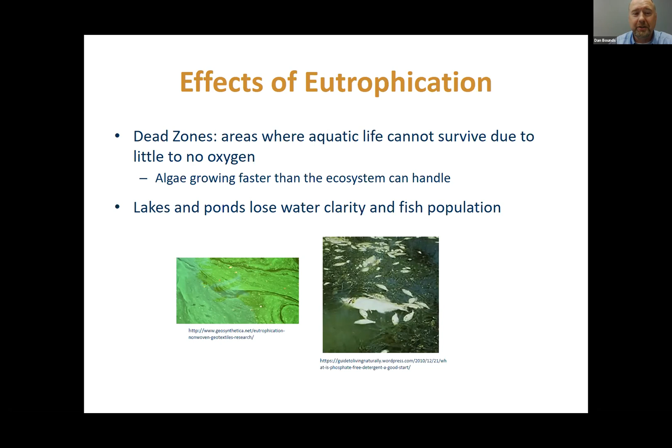These are areas where aquatic life cannot survive because of little to no oxygen. That algae is just growing faster than the ecosystem can handle. Lakes and ponds lose the clarity and the fish population. And I think maybe the most famous dead zone is the one at the end of the Gulf of Mexico basin that Jason showed earlier, which can actually be seen from space on satellite images.

Fuels and petroleum products have different levels of toxicity. It's common knowledge that spilling a fuel or oil into a waterway causes environmental harm. But in a small or shallow body of water, it doesn't take much of a spill to have acute toxicity, meaning it's poisonous to animals and organisms right away, creating a kill environment. Chronic toxicity can also occur from small leaks, spills, or mishandling of fuels and oils over time. The second largest fish kill I ever responded to as an engineer was caused by mishandling of fuels.

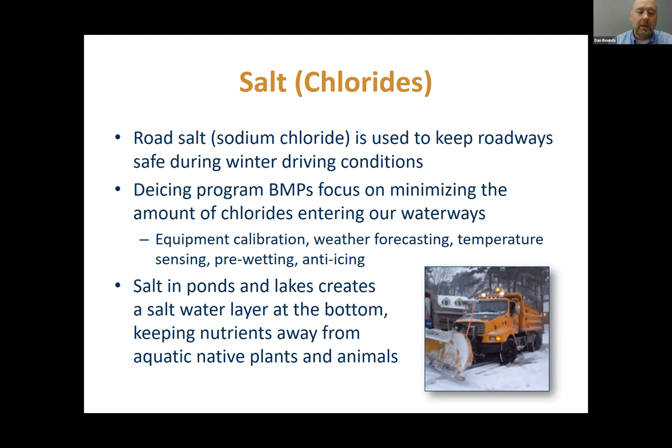Salt is in the news a lot. The chlorides from the sodium chloride in salt are used in winter to keep roadways clear and safe. We have de-icing programs focused on a variety of BMPs to keep roads safe while using the right amount of salt and chlorides. But excessive levels of salt in our ponds and lakes create a saltwater layer at the bottom over time, which keeps nutrients and other essentials away from aquatic plants and animals.

Elevated concentrations of chlorides affect the overall growth, reproduction, and survival of a large range of invertebrates, fish, and amphibians. It really affects everything in the waterway.

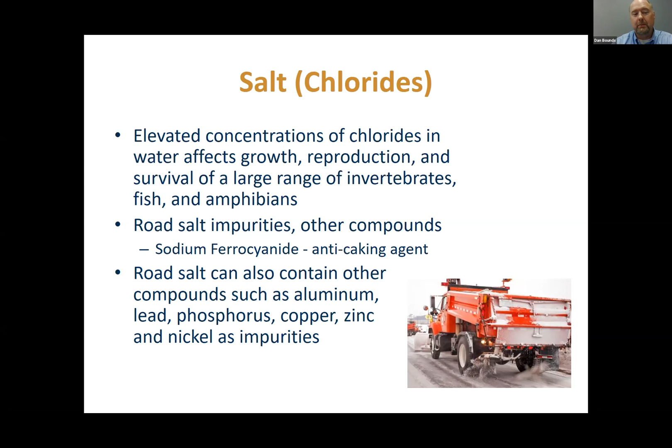Salts can also contain impurities and other compounds. Sometimes anti-caking agents contain a cyanide compound that could be an issue. We're not putting laboratory grade salts out on the road, since that would be super expensive, so the road salt typically purchased has concentrations of metals and phosphorus in it.

On sanitary waste: bacteria and other pathogens can get into our recreation areas and cause illness problems. When doing sanitary sewer work in the field, make sure sanitary water and cleanings aren't making it into the storm drain system. If vacuuming out sanitary manholes, make sure equipment drains back into the manhole before moving on, rather than letting it drain into a curb or inlet.

Think about what you've got at the shop and in your vehicles and equipment every day: cleaners, detergents, solvents, pesticides, paints and coatings, oils, fuels, and other materials. Every one of those has a toxicity associated with it at a certain concentration. So even if it says environmentally friendly or EPA approved, enough of just about anything will create a toxic situation in our local waters.

In summary, stormwater carries pollutants to our waterways. I hope we've made that message clear through the presentations. These pollutants can be harmful to aquatic organisms and ecosystems, affect our drinking water sources, and affect how we use our waters for recreation, like fishing and other ways we enjoy our local waters. So performing pollution prevention practices in the field really helps protect those waterways. These slides give an introduction to how different materials and chemicals you use actually affect the organisms we're trying to protect.